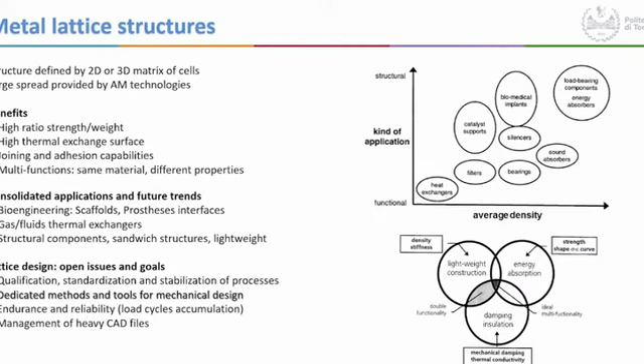So, as you know, this kind of structure has had large diffusion in the last years due to new manufacturing technologies, and they are starting to be used also in structural applications like sandwich structures, lightweight applications, and so on. And so we need to increase our ability to simulate and predict the fatigue failure modes in order to provide more reliable design solutions.

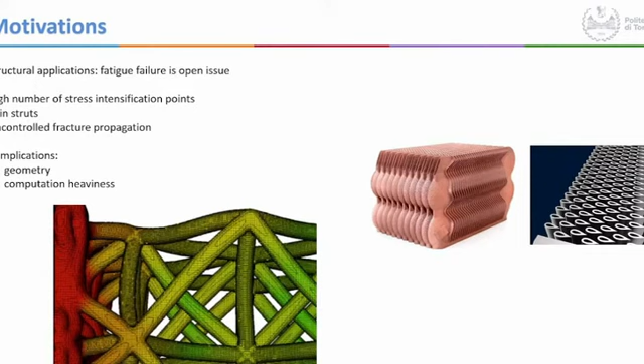So this work starts from the main limitations of the current state of the art in this field, because lattice structures have a high geometrical complexity that increases the computational time and heaviness. And so we need to develop some compact models to predict the failure mode and the lifetime under fatigue of our structures. So we propose this method that is based on 5 steps.

So we start from a lattice structure that is loaded with an alternate cyclically variable force or load. And as first point, we propose to calculate a homogenization of the lattice structure by using, in this case, the assumption of constant strain energy in order to have fast and easy simulation of the entire lattice structure, and to be able to identify the most loaded cell of the structure. In this way, we can limit our considerations only to the most loaded cell of the structure, reducing a lot of the computational time.

After the identification of the most loaded cell, we can provide an inverse homogenization, again with a constant strain energy assumption, to rebuild the effective distribution of stress inside the cell, and to be able to identify the most loaded point of the most loaded cell, and to use this point to calculate the fatigue life, for instance, by using a traditional multi-axial fatigue method.

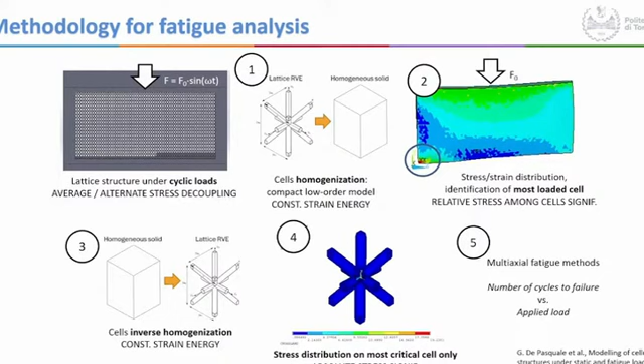So we used very simple samples for the characterization of the method with uniform and graded lattice. The material in this case is Inconel 625, produced with additive manufacturing process using a Renishaw machine. The other data of the sample are reported there.

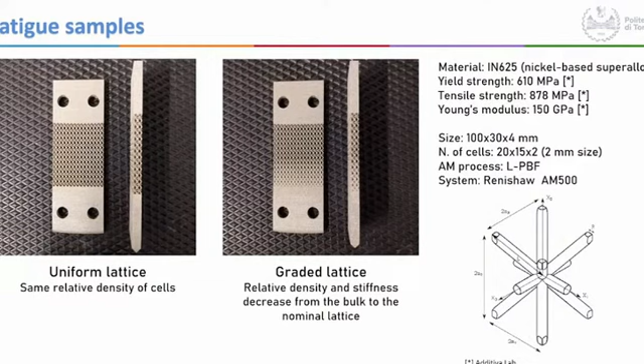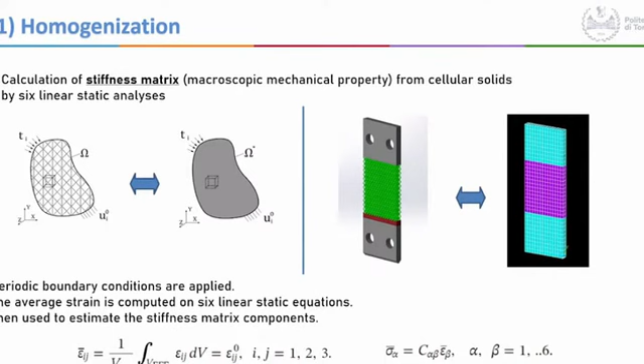So as first step, we provide the homogenization of the structure by calculating the stiffness matrix associated to each element. And this is done very easily by using 6 static equations under the hypothesis of constant strain energy. And then we used these 6 equations to estimate the components of the stiffness matrix elements. So in this way, we are able to provide a very fast simulation in the static field of our sample. And in this case, the 2 components of the fatigue load, average and alternate components, are separated and used to provide 2 separate simulations.

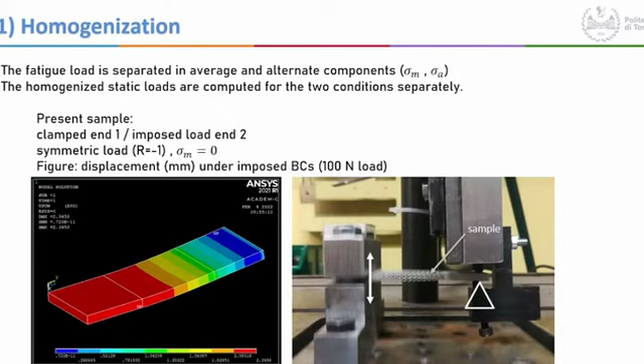And so in this case, our sample load is a cantilever beam. So we applied the experimental load on one end and the clamping on the other end. And we measured, in this case, the displacement under 100 Newton load.

The next step is to calculate the distribution of the norm of the strain tensor across all the lattice structure and to identify the most critical cell of the structure. We can also use the value of the stress tensor, but only in a relative mode, let's say, between the different cells, because now we don't have the real stress distribution in absolute value because we are using homogenized elements.

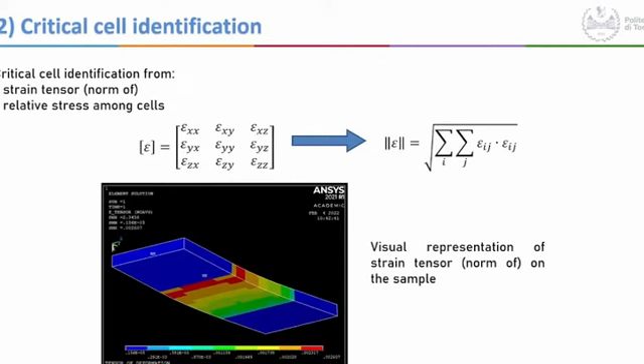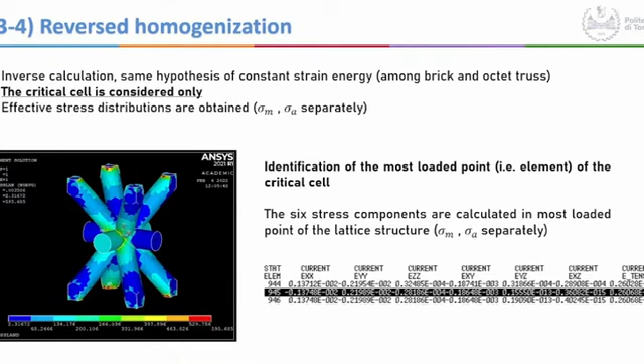Then the next step is to provide the reverse homogenization to recalculate the stress distribution across the cell, but only considering the most critical cell of the entire lattice structure. Now we have again the real effective stress distribution, and we can use this distribution to calculate the most critical point of the most critical cell, that in this case is in the core of the cell. In this point, we can estimate the 6 components of the stress tensor, again by considering average and alternate components of the fatigue load separately.

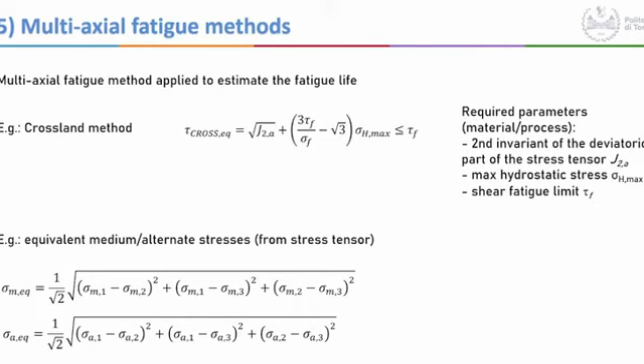Then at this point, we can use these components of the stress tensor to use a multi-axial fatigue method. We can use the Crossland method or other well-known methods, and use this equivalent medium and equivalent alternate stress for the fatigue life estimation with, for instance, Haigh or Goodman-Smith diagrams.

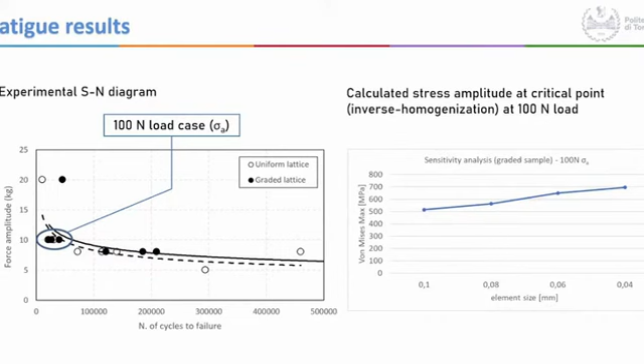Just to see what happens with our samples, here on the left, we have the SN diagram where we reported a few experimental results of fatigue failures of graded and uniform lattices, then applying this method only at the level of 100 Newton in this case. On the right side, we have the sensitivity analysis of the simulation corresponding to the most loaded point of the critical cell. And we estimated the equivalent stress applied at that point.

From the qualitative point of view, the method is able to predict quite precisely the location of the expected fatigue failure for the 2 different geometries. So the lifetime is almost the same because the most loaded cell is subjected roughly to the same load, but the location is different because in one case we have uniform, in the other case graded lattice sample, and so the position of the maximum strain value is different and is predicted by the model.

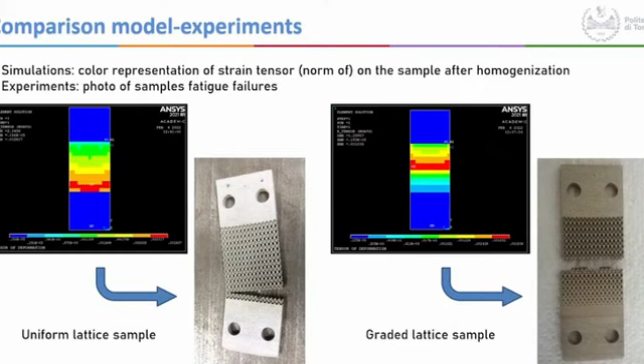So to conclude, this is a method to estimate the fatigue life of lattice structures and to predict the localization of the cells that are the candidates for the fatigue failure. The method is able to estimate the fatigue loads with the approximation of separation of average and alternate components. The advantages are that the method is fast and computationally light.

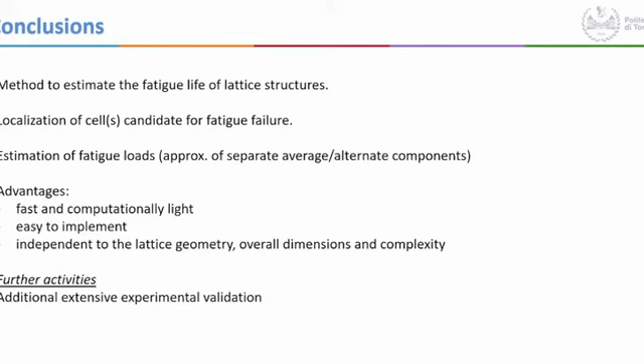It's easy to be implemented because it's a sort of automatic algorithm, and it is independent of the lattice geometry, the extension of the component, and the complexity of the lattice geometry. The next step is to improve the experimental knowledge to validate this method more consistently.